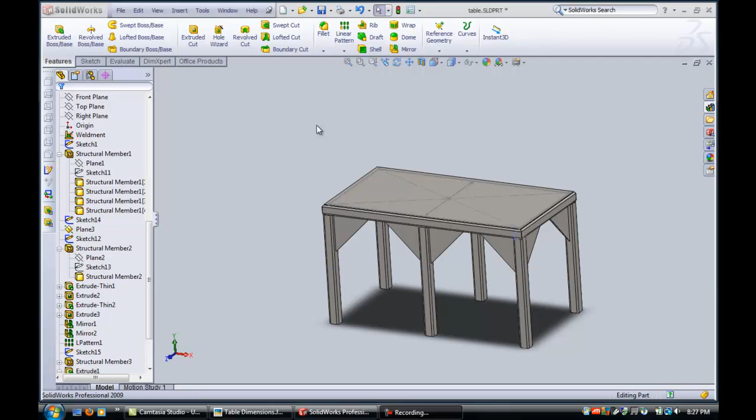Okay, so welcome back to the good old steel table creation exercise. And here we've got all the gussets. I've put the middle ones on there now, same way as I did the ones on the corners in the previous video. And this is going to be one seriously strong table.

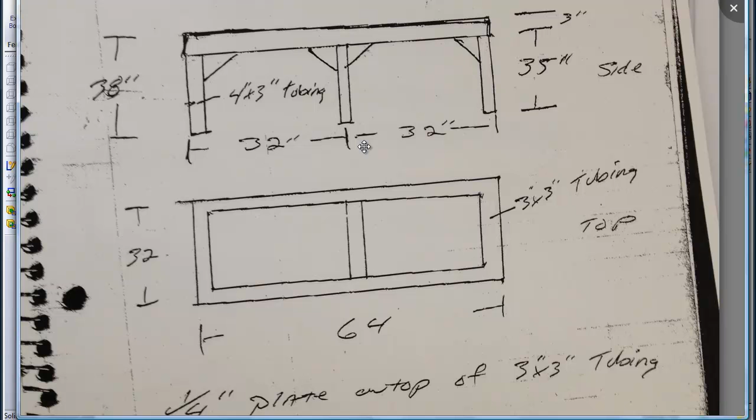But I was just looking at it, and I didn't notice anything on the sketch about having any feet or supports on the bottom. Usually, this table is meant to hold an industrial blower and some pretty heavy motors with a drive system on there. So it needs to have some kind of feet that you can bolt it to the ground. Sometimes they also use the feet to connect to a vibration or some type of a machine mount or isolation mount. So I think it really should have some base plates on there. So I think we should go and add some in.

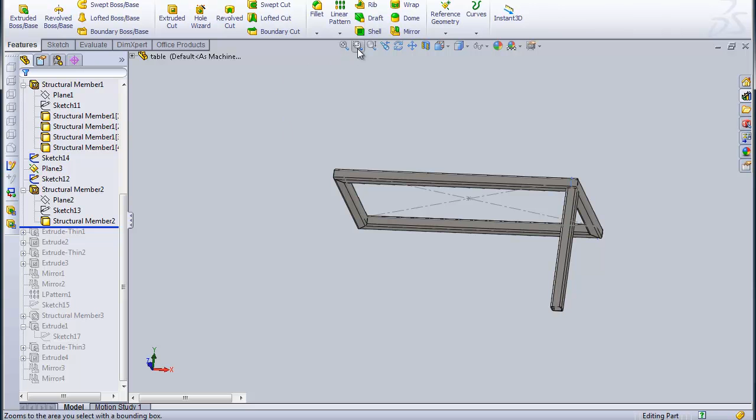And once again, that's something we need to roll back the rollback bar for. And let's just pull that back to the original leg there. And let's go about making a base plate. Probably the most practical way to do it would be to just sketch on that plane there and just make a rectangular base plate. And I'm going to make mine facing in.

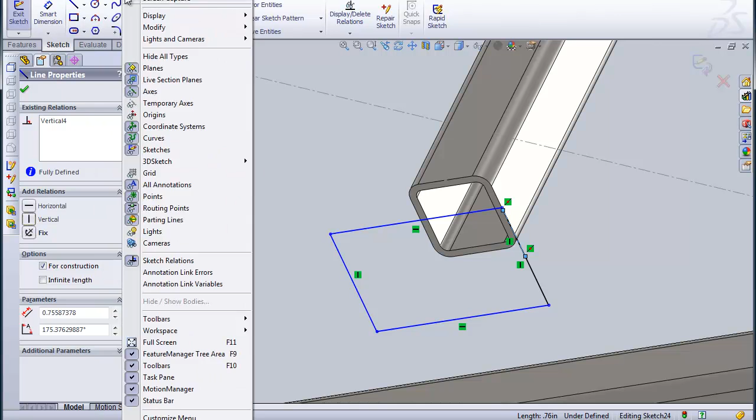And although there's lots of ways you could do it, I think what I'll do is I'll just get a center line here and I'll make it coincident with that center line. And actually I didn't want to make it vertical. Let's just undo that and make it horizontal. There we go. That's what I was after.

So now it's centered up, and I'll leave, let's say, ½ inch so the guy can weld it all around. That sounds more than reasonable. And I need to leave some room for a bolt hole on this side. So I'll make it 3 inches, but it probably is going to be too much. And I'll just make this one on the other side here. I'll make this one ½ inch so it's consistent all the way around.

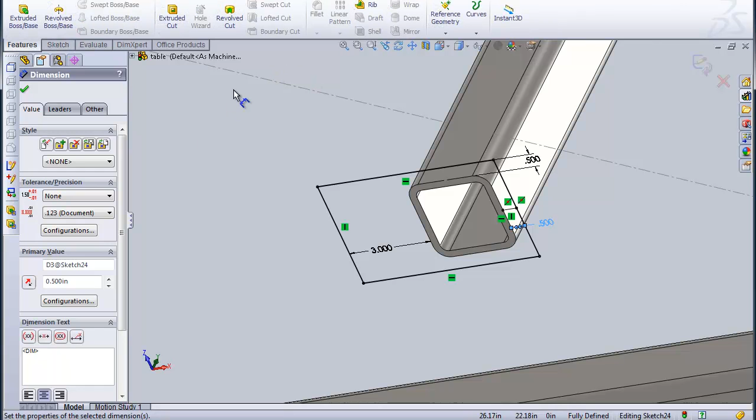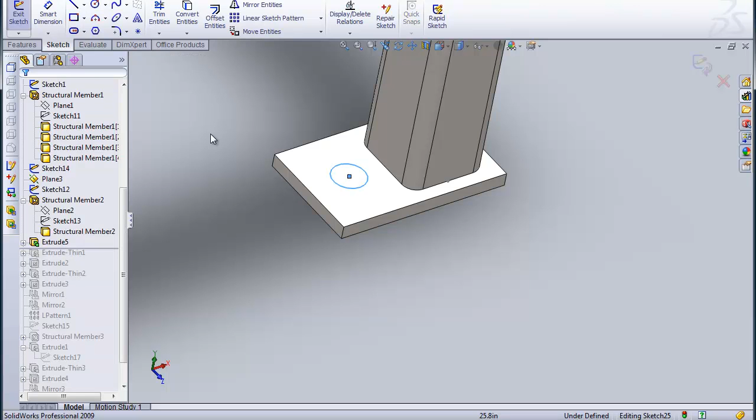And let's give it a ½ inch base plate on the bottom. And that should be plenty enough to hold this thing. And as for a hole here, I'm just going to drop a 13/16 hole in. Use a 3/4 bolt, which is again pretty substantial. I think a 3/4 is the largest Hilti Kwik Bolt that you use for joining these things to a concrete floor.

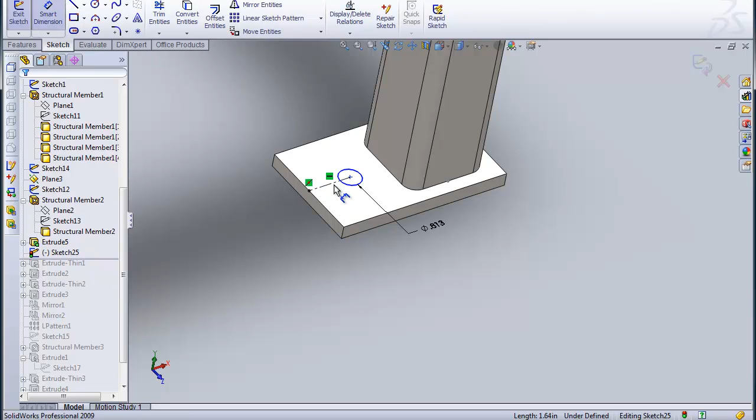So let's make this one 13/16 for a 3/4 bolt, and we'll just get the bolt hole centered up here, same way as I did the pad, and it needs a horizontal line. And we made this 3 inches, so this would be, I should really put the dimension on the other side.

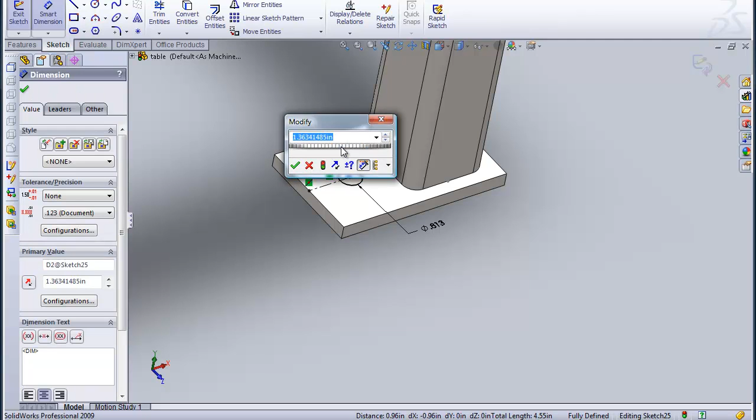Usually in a structural steel shop they have distances called gauges that tell you how far to put holes away from other members so that there's enough wrench clearance. And this one I'm going to set at 1 1/8. I think that's the right gauge for that. And that should give the operator plenty of wrench clearance to install that table. So I'm going to cut that through now.

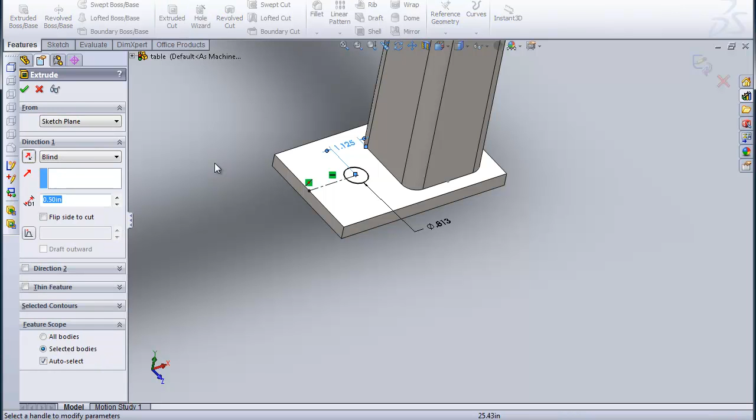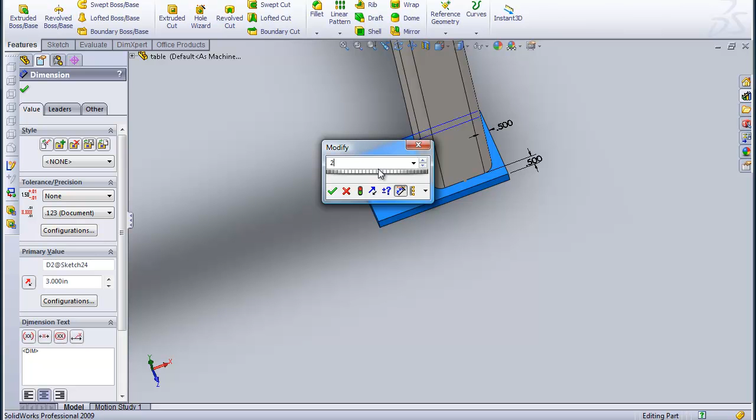There we go. And with that 1 1/8, the 3 inches looks maybe a little too big. Maybe I can cut that back to 2.5, maybe even 2 inches. Let's say 2.5. And there. That doesn't look too bad.

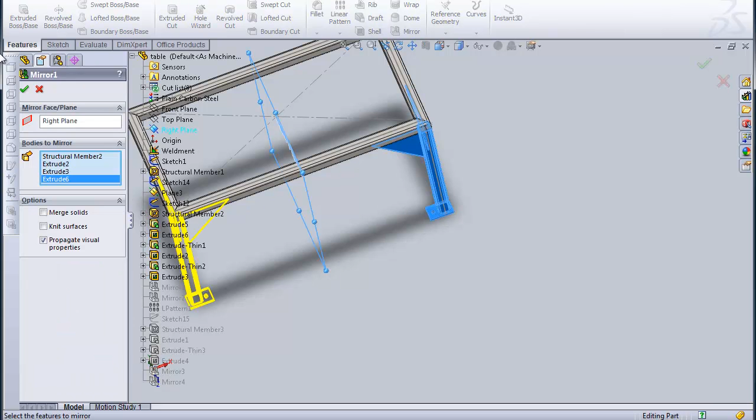And what I'll do is I'll now move this ahead to where the mirrors are, and we'll get these mirrored to the appropriate locations. This mirror here, I'll pick up this one, and the other mirror, I'll just edit that one, and I'll add in these two base plates. So now we've got 4 base plates, and we'll have to do the same darn thing with the other two.

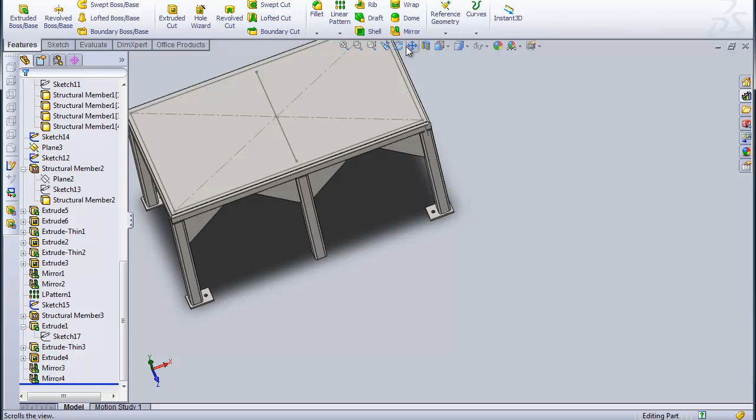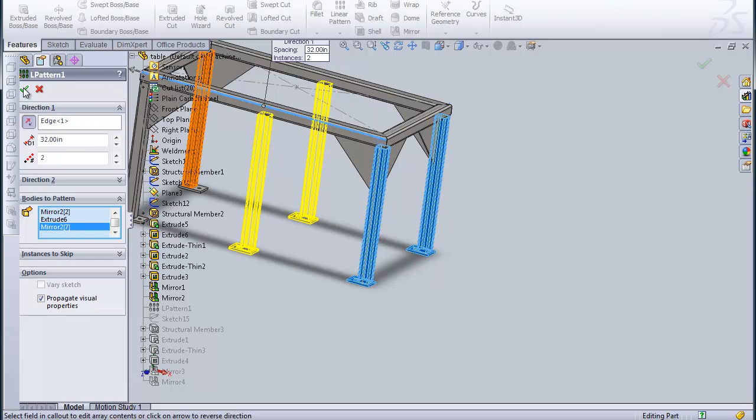So probably the easiest way is to just pattern, so we can probably make use of the same pattern that I used for the middle legs. And let's just find that pattern. There's the pattern there, so we'll just edit bodies. Let's see if we can pick up these 2 plates here, and that gives us our legs. And if we pull the rollback bar right to the end, we get our tabletop back. And now there is our terribly strong steel table.

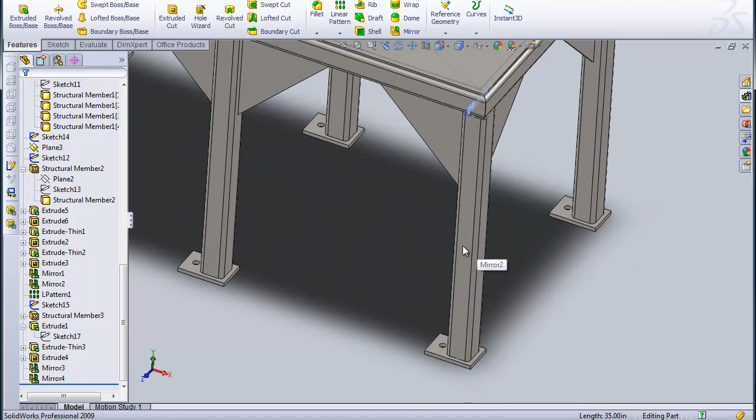One other thing, since I added a 1/2 inch base plate, I need to shorten that leg to maintain the dimension, or otherwise I'm going to gain 1/2 inch, and the engineer is probably going to get very upset with me. So we'll take off 1/2 inch from that to maintain the height, and that should shorten all 6 legs at once. There we go, and there's our table, and we're continuing on.